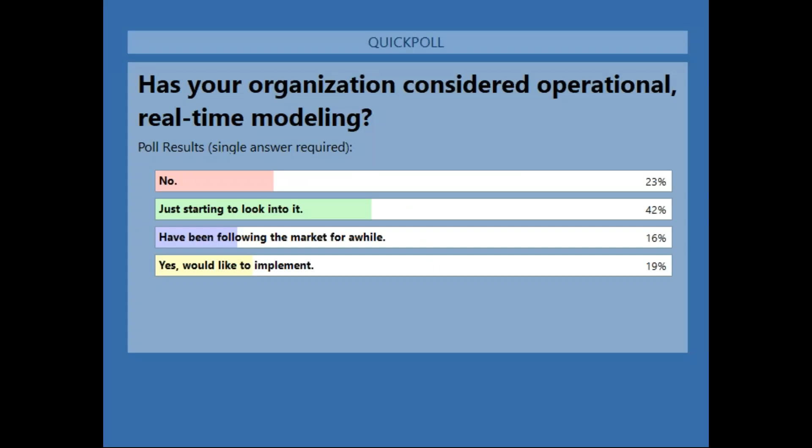Denver Water had some experience with this, and last year we decided to try to make the business case for this. We have a new Business Technology Management Office, I'll call it BITMO, that controls any new IT purchase. It's a pretty detailed process, and not only do you have to convince upper management that this is actually a good idea, but when you're done, you get ranked against anybody else's case, and that kind of determines when you get implemented.

So to make the business case, we also had to list out the costs. The software obviously costs something, plus a new server - probably wish I would have gotten two for this, but we can cross that at a later day, one's fine for now. Then there's the IT time to set this up, install the software, and configure some groups. I actually got control of one group for accessing the server, which gave me a little taste of the power that IT people must feel all the time. It was a new experience for me.

And then there's my time linking the model to the historical SCADA database and refining the model, which is just kind of a part-time thing that I do as part of my role here.

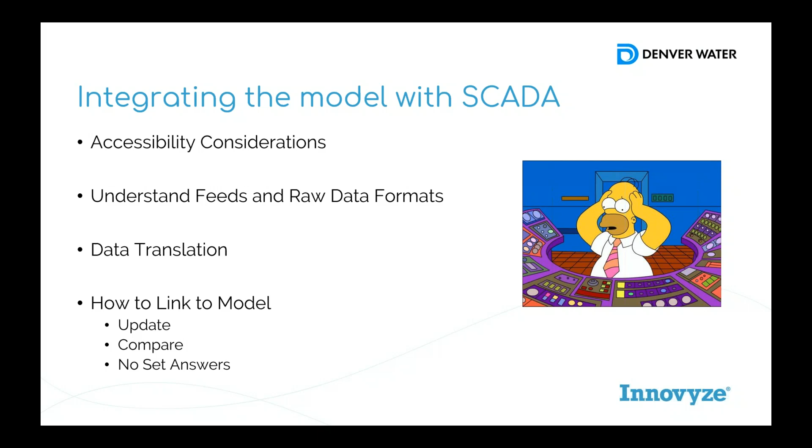After that, it's a lot of time understanding the feeds and raw data formats. A lot of times if you extract data, the program you use might extract it in a friendlier format than the raw database stores. Sometimes you just need to know what sort of information it's storing, what the units are, and stuff. Based on that, you can decide how you want to translate the data and link it to a model, which I'll be talking about in detail. But there's not really a set answer for some of the trickier things you're going to try to integrate.

For me, I have quite a few feeds - approximately 1,300 feeds that I'm looking at linking between the model and the SCADA, some of them to update boundary conditions, some just to compare results.

We include in our model all 68 distributors that we deliver water to, so we don't have SCADA on some of their things, even though there are benefits of having it in the model as opposed to just a demand - it gives us a better idea of what they're actually doing in the system. But with this, I can look back in the future at any pump and know these are the SCADA tags associated with it.

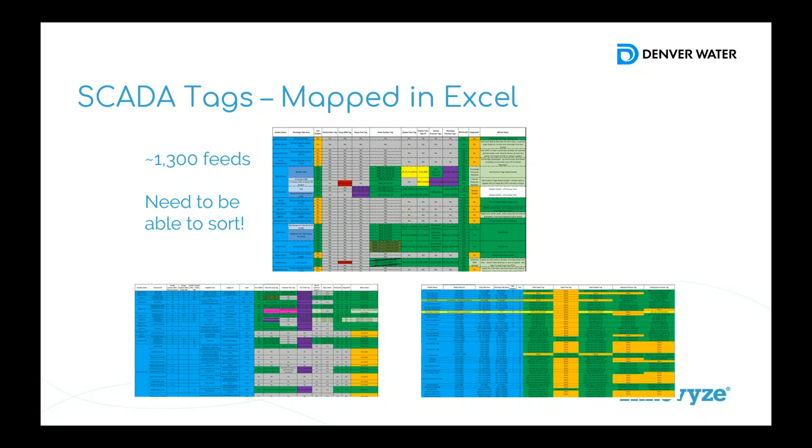So this is nice because once I get the configuration done, which is about 98% complete, I probably won't touch this for a while. So when I need to come back to one of these because the tag changed or something, it'll be pretty beneficial just to have all this mapped out. This also helped me know if I needed to translate data.

So a couple things that are interesting at Denver Water is we don't store binary data, so we don't store like if a pump is on or off, for example. And then another thing is just the way valves work. So in EPANET, a valve status is not something that you're going to find in a SCADA system. So how do you get valve status from what you have in SCADA?

So I have a few different examples here. If you look at this table, feed names are kind of my feed names - I just define the connection name myself. But then I have these lookup tables, units, and then some offsets and factors. So in here is where I can translate a lot of data. A few good examples of this to be aware of.

One is I have one valve, but I have two feeds - one is position, one is status. These actually look at the same SCADA tag, except the status one is using this lookup table. So I have these different lookup tables that I use to translate data.

And so if you look down here and find the same one, what this basically entails is: if my SCADA returns a value between -5 and 5, I'm going to assume that valve is shut, and 0 is what EPANET wants for a shut valve.

I do this for two reasons. One, if I put the lower limit at 0, I've seen SCADA systems sometimes come back and be like -0.1% open. Well, I know that valve's shut - I wouldn't want it to use a default value. The other reason is because if the valve is like 0.8% open, due to the head loss curve that I have for some of my control valves, I would be letting flow through there, and I know it's shut in reality, it's seated. So again, just trying to get around that.

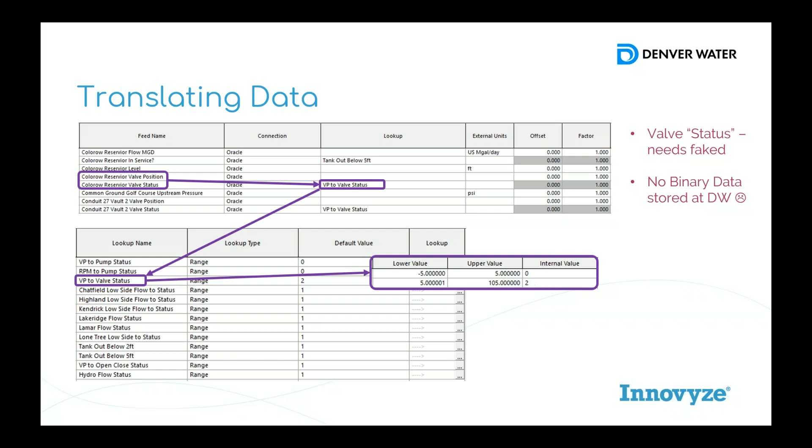Now, what about some other type of valve? We have valves that the controllers just open or close - they're just basically to block off flow from one direction to another. So in this case, it's basically the same thing, only I have a 1 because if it's open, I just want to have it open. These are valves that are never throttled, and so I don't want to do that.

Similarly, I didn't put this as an example, but if you look at the top row, you'll see VP to pump status. Again, we don't store pump status in our historical database, but for our fixed speed pumps, they all have a downstream valve that is in SCADA, so I know from the position of that valve if the pump is on or off. Similarly, at a VFD station, we might not have status again, but we do have flow.

So knowing based on the flow - this is MGD - if I have a very low flow value, I'm going to say the pump is closed, and if I have a higher value, I'm going to say it's open.

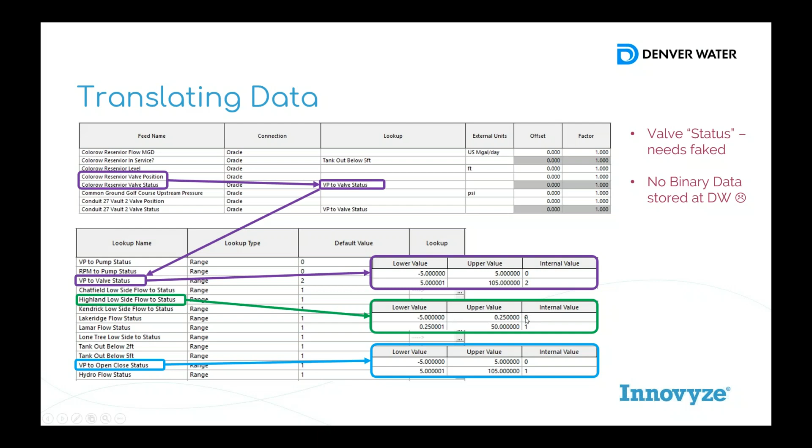So one other thing that you get into with this is setting up operational controls. So you might have places where it's not normal operations, but you know it's something that is used from time to time. One of my best examples is one of our major facilities - it's a pump station and a control valve that move water 2 directions, and it balances flow between 2 plants. Now, if a plant's offline, it's pretty normal for this station to be used constantly, but other than that, it's not. So it's kind of an interesting facility because it's not normal operations unless there's an outage, but it's not abnormal because it's connected to a big conduit.

They want to keep it fresh, so pretty much daily it's at least opened up a little bit to make sure the water's not sitting there. And so in a case like this, there's really not a way to put in a control of when the operator would turn it on based on water quality, because it's just not a consistent thing.

It's something they kind of track themselves. So what you do is you can put in closed-only controls. So this way, if I'm running the model and the station is on, what I have is a control to shut it off so that I don't overflow the tank downstream. I don't need any trigger to turn this on.

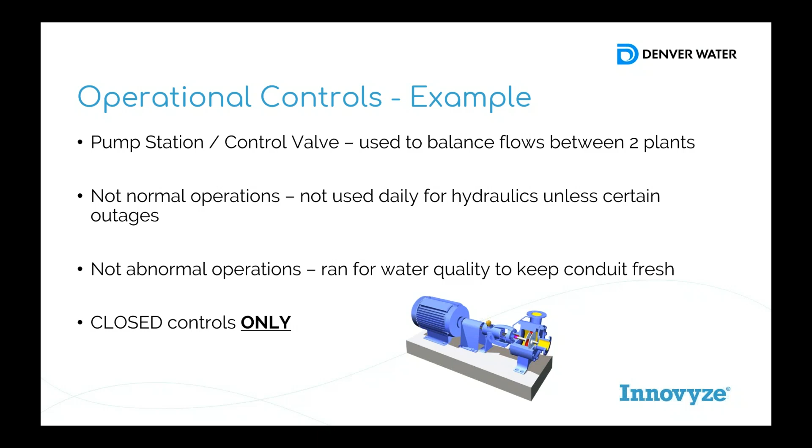Maybe in the future, if I set up models specifically for plant outages, I may get into looking at that, but there are a lot of times where you might just put in a closed control, and maybe the operator's doing something. Maybe it's a pump station they don't use a lot, but they like to run the pumps to keep them fresh, things like that.

Just looking at integration order, if you guys ever look into this, it's always nice to set up your tags in order, and I've learned this from multiple systems I've set up over the years. Tank levels are pretty straightforward. Boundary condition, you can update the level, it's easy to compare. I always recommend allowing overflow. If you're in InfoWorks WS or InfoWater, you can do this. And it's nice because in reality, if the tank gets full, it normally overflows.

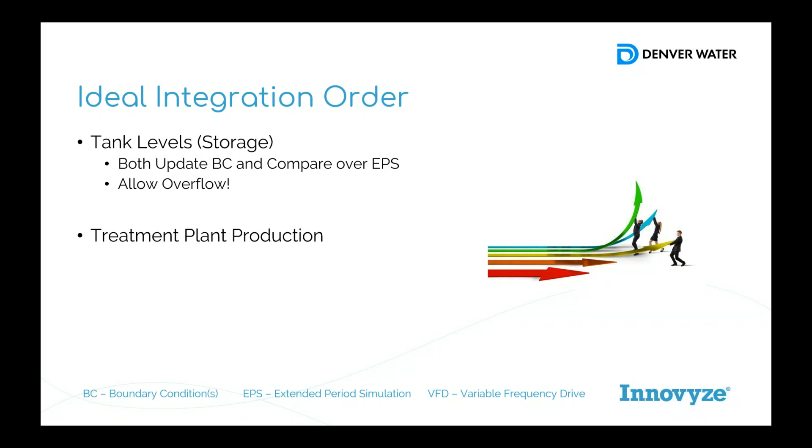And if you're just in normal EPANET without this option, it's going to artificially pressurize the system. You're going to start sending flow in directions it wouldn't really go, and it's just a lot harder to troubleshoot. Treatment plant production is pretty straightforward. Obviously, if you get your supply right, you're set up pretty good. And then pump stations, typically is the pump open or closed? You can compare flows and pressures.

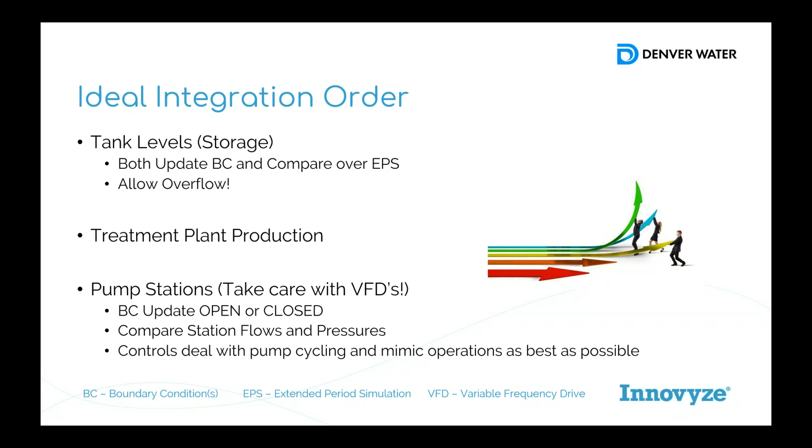I encourage people not to try to mimic the pump cycling. You want to mimic the pump operation. So maybe they have a low duty and a high duty pump and you know when they tend to use them, you can do that. But if they have like 3 of the same pumps and they cycle through them, there's typically not a whole lot of benefit to worrying about mimicking the cycling as long as the station is operating as you would expect it to be. And then VFDs, I don't really have time to go into this, but you do have to be careful and play around with these quite a bit more in my experience.

And then when you get to valves, basically filling valves are pretty simple. A lot of times it's just open or closed, or maybe 50% is pretty much their standard position for opening. So those tend to be the easiest type of valves. Major control valves are a little easier as well because you can either say open or close, or you can get that position if you have a good head loss curve. If you do have a SCADA system where the operators can enter flow and the PLC will set that, then you can also do those as well. And then comparing flows and pressures is the main idea.

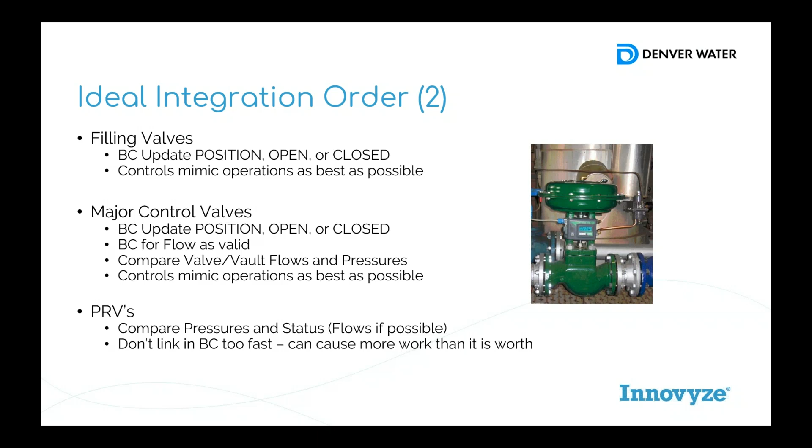The trickiest ones tend to be with PRVs. I always encourage to compare pressure and status to see if the PRV is active. But I say don't link these in too fast. You can chase your tail for quite a long time, and I've done this on quite a few networks. So right now, I don't have any PRV linked in to actually determine if it's open or closed or to set the downstream pressure in my model. This is purely a comparison thing to see how much I can tweak my model before I decide if I need a PRV linked in. That'll save you so much time if you're ever doing this.

So just a quick polling question here: what is the biggest hurdle to committing to an operational or real-time model? Just looking for some feedback from you guys on that.

Kat, I can talk to that just a little bit here. This is Greg Brazzo, and I've been in industry for quite some time, both on the consulting side of things as well as the software side of things. And over the years, the main answer that I've gotten to this question has a lot to do with staffing. It's not necessarily just genuine buy-in of predictive modeling, of operational modeling, but historically I've gotten a lot of concern over taking folks on the planning side of things, folks on the operations side of things, and how it's going to work, where you're going to put those folks together in a room to hash out the best way to move forward with these things.

It's just something to stew over for a little bit, but I've heard that a lot over the years from a lot of municipalities. What I'm generally hearing these days is that the planning group and the operations group in a lot of districts, municipalities, tend to be getting closer. There seems to be a lot more communication. I don't know the exact reason behind that, but I think it's good for the industry. Just something to think about.

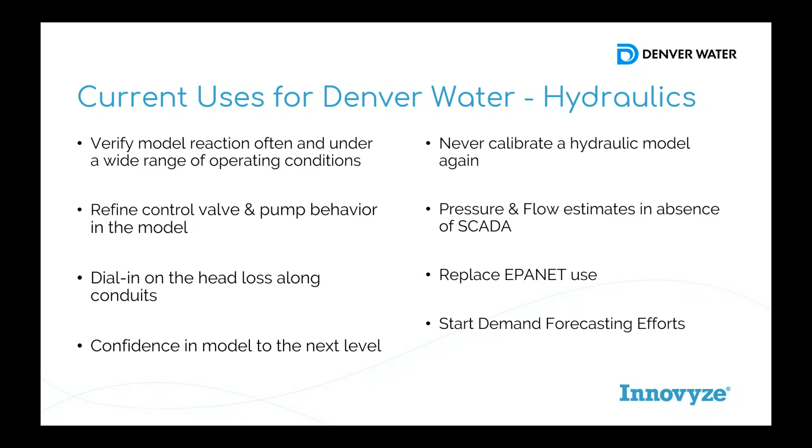So it's pretty cool. People have asked me for this before, and now I can just run a steady state model with all my tags linked in, and it'll give me the best estimate of flow and pressure at the current time. We do have some people using EPANet because InfoWater is too hard to use for them. So that's going to be nice. And then starting some demand forecasting. I, again, don't have time to get into that.

Something that I hope to start this next week, actually, is we're going to try to give people a current real-time water quality in the system. Near real-time, with the SCADA latency and the time it takes to run this, it'll probably be 20 or 30 minutes out of date, to be honest. But the idea will be to have a web browser where someone at the lab has a weird sample and they want to see, well, what do we think the water age was when we took this sample? They should be able to figure stuff like that out, which should be pretty neat.

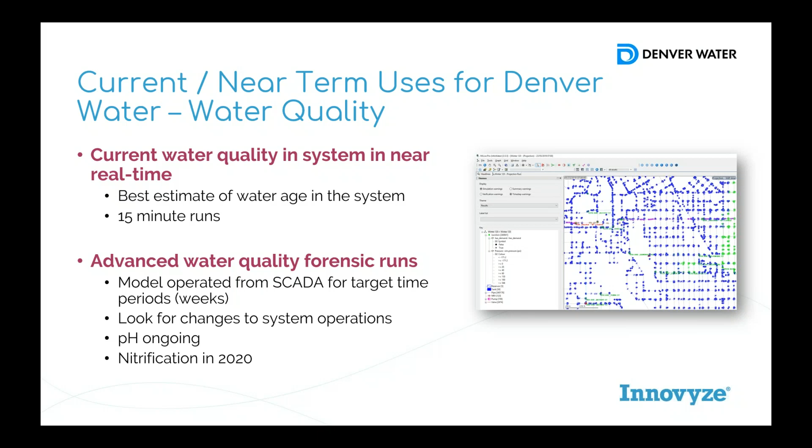And then we're also getting into some advanced water quality forensic runs. So operating the model how it was based on SCADA for 2 to 3 weeks. And then pH is one that we're starting up right now to look at. Nitrification is tagged for next year, and we might look at system operations when we're taking facilities offline. Can we change some of these operations to enhance our water quality to some of the targets that we're looking at?

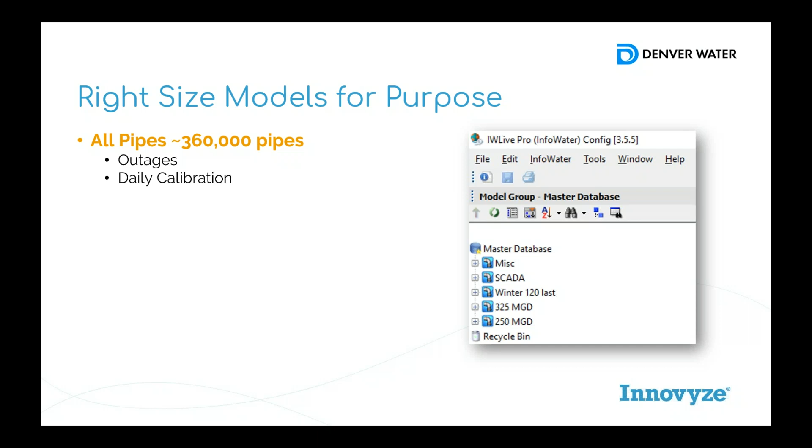I would always say right size your models for a purpose, which depending on your model may not be a big deal, but our all pipes model is about 360,000 pipes. So I'll run this one for daily outages and daily calibration stuff. When we run water quality, we never need water quality at a dead end with no demand. It just makes the results look bad. So we'll use facility management to remove all the hydrant laterals and stubs and bypasses. That should knock us down about 90,000 pipes.

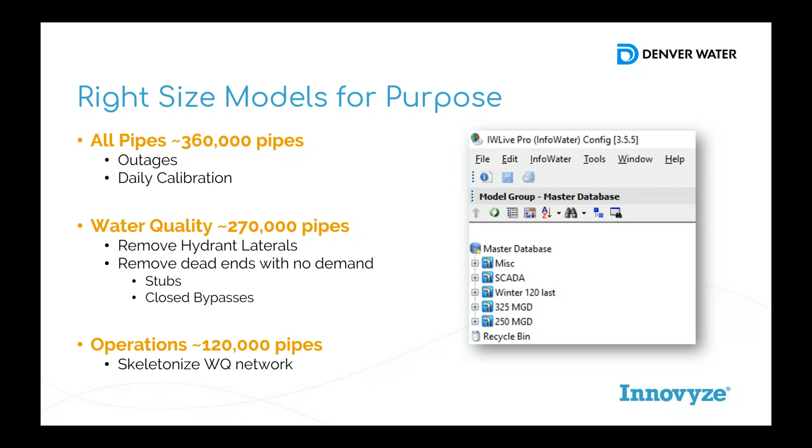And then for operations, if load control looks at this in the future, what we want to do is get that down to about 120,000 pipes so it runs faster. Having said that, they still have the same number of SCADA feeds, so the query on the SCADA system, you can't really improve that. And then just quickly, some possible uses to wrap up, stuff that we're going to show O&M that they may use it for. They could monitor pressure and flow on their own, not having to call me up.

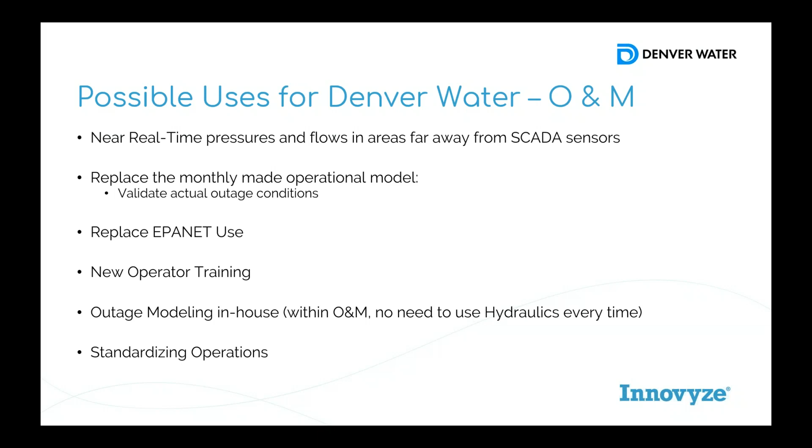In the past, we've given them a monthly outage model just for them to be able to mess around with. They can now do this based on current conditions, and they don't even have to bug us or try to use EPANET, which should be nice for them. New operators might like this for training. If they want, they could standardize operations. It's kind of up to them. That's obviously not my department.

People might want to run this, get in and say, hey, well, if I run the system like this for the next 10 hours, maybe I don't pump during this time of day and save some money and stuff like that. I kind of talked about the water quality.

One of the GIS integration things that'll be interesting for me is every time we replace a PRV or control valve, it gets a new GIS ID, which I know how to sync with the model, but I don't even know if that means a changing SCADA tag. So it's just some process that I'm going to have to look at in a few months the next time I update the model from GIS, and then possibly tie into optimization or a bigger decision support system. And that's kind of it for my presentation.

I'll leave you with one more polling question, and then I'm going to switch it over to the other presenter. The next question would be, do you think that your operators would believe in an operational and real-time model? It's just been one of the more fascinating experiences of my life, getting to work with engineers and operators both. And so to me, this is a really fascinating question.

And as you answer that, I will just turn it over to Ron Smith, Systems Optimization Analyst down at Colorado Springs. He's a great guy. He's doing some really cool stuff he's going to show you about. So I'll let you take it away, Ron.

Yeah, and Ron, before you get going, this kind of tees into the points that I was trying to make a little bit earlier. In a lot of cases, historically, we've gotten some buy-in challenges, and it tends to be on the operations side of things. But what we've seen over the years is folks on the operations side have actually been using modeling software and software that can aid them day in and day out. And so I think we're going in a really positive direction when it comes to this.

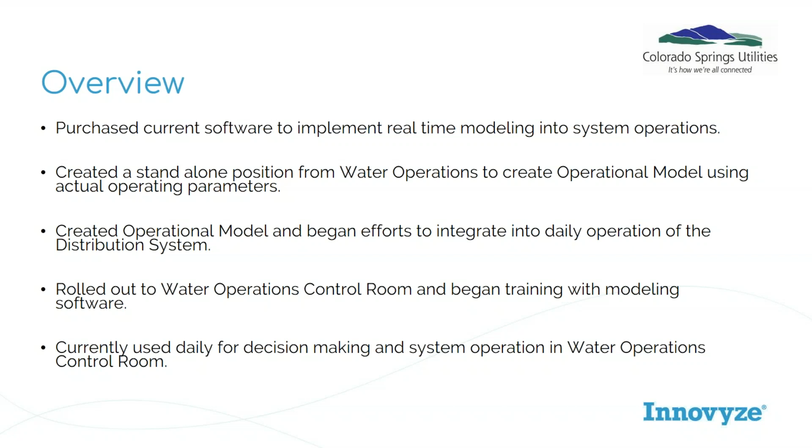One of the most important things that we focused in on early on, and I think Kedrick touched on it as well, is just having an accurate demand in the model. Our winter months might be 40 million and our summer months can be 120. And then we have the shoulder season in between.

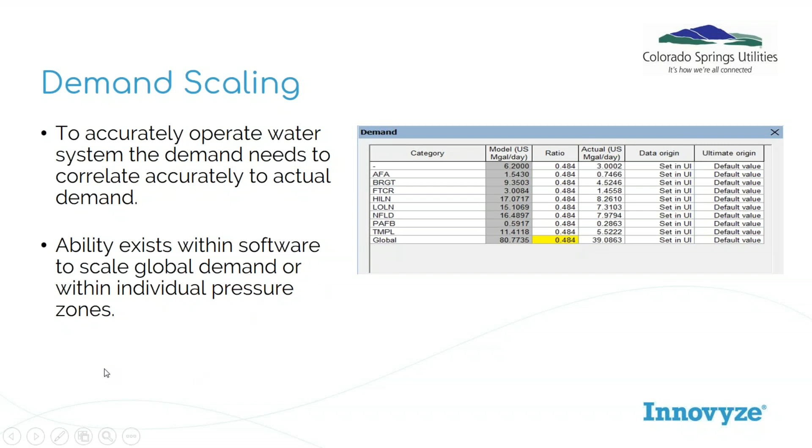One of the features in our software is an ability to scale the demand, both globally or by pressure zone. So we have a ratio in there, and in this case, you'll see the 0.484. To arrive at that, we use an Excel spreadsheet to determine our consumption based on production rates and tank levels. So in this example, for that day, an operator would have predicted a consumption of 65.5 million gallons in our system.

So we've created another spreadsheet with the factoring to determine what it would scale the traditional demand to. In our case, in the summer, it's 125.4. So this 0.484 would be entered into the demand scaling window. And then when they run the model, and the operators do actually run the model in the control room, they would be intending to run 65.5 million gallons.

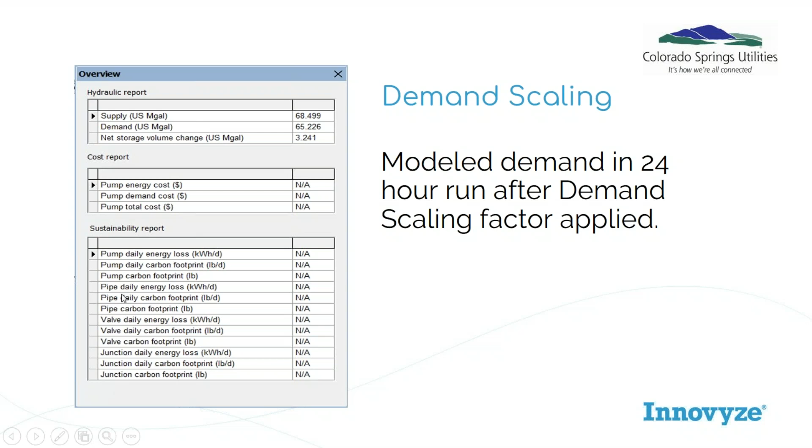Our methodology by using this, obviously the operational adjustments are being made using modeled results rather than operator intuition. I myself operated before I took this position, and I would operate a single valve, and I may have thought I know what could happen to every tank, but this is taking it to the next level. One of the big issues that we've had at this company is just the movement up and down of treatment plant rates to affect tank levels.

And we make the treatment plant production rate decisions through the model as well. On a day where we might have made 5 changes in the past, we make 1 at this time. The majority of our flow control valves and pump stations in the model are operated using a live control feature, which I'm going to segue into next. The live control is a major leap in the accuracy of the model.

Then you get into the predictive state, looking out past the current time of the model run. We look out 24 hours, and they will make manual entries, being a predictive move that they want to happen to a valve or a treatment plant rate, looking forward to balance the system.

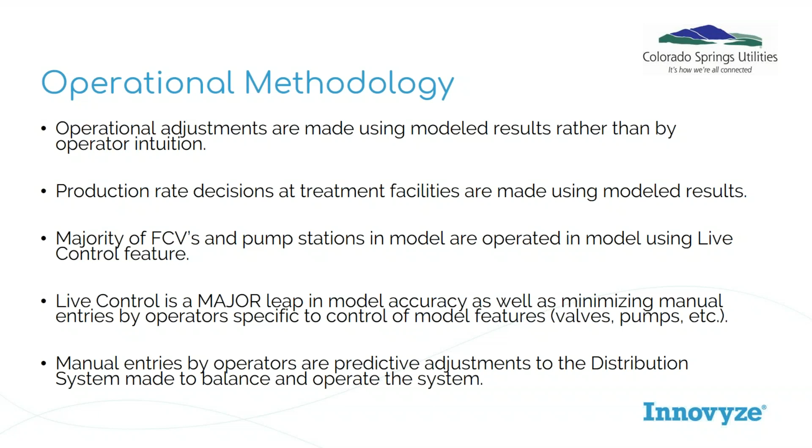So live control is in the menu of setting up a valve. If you look here at the data origin, it says that it's live data. By that, it means it pulls the SCADA data every 10 minutes, and then it logs it into the model as the flow that was happening at those intervals, or pump statuses on and off.

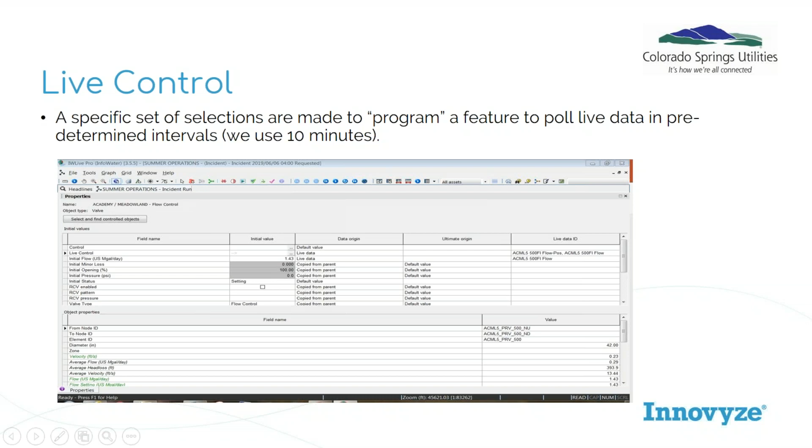And what it creates by taking all of this data is, the graph for real time is really going to be the predictive result as well, until you update the data or tell it to do something different, where in this case at 5:50 in the morning they closed the valve, so it went to no flow.

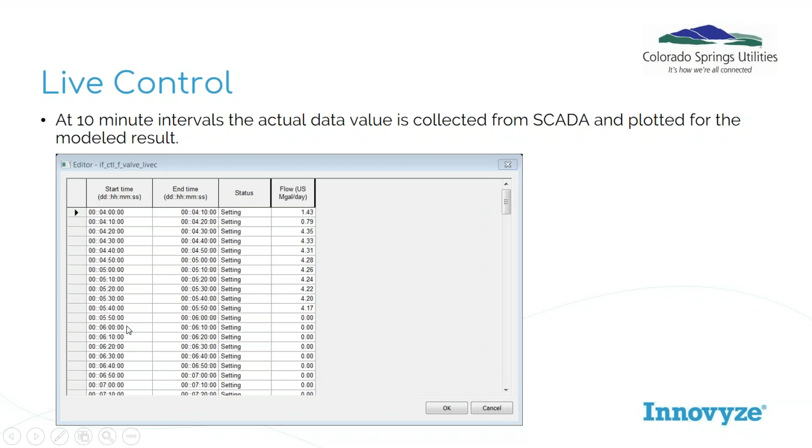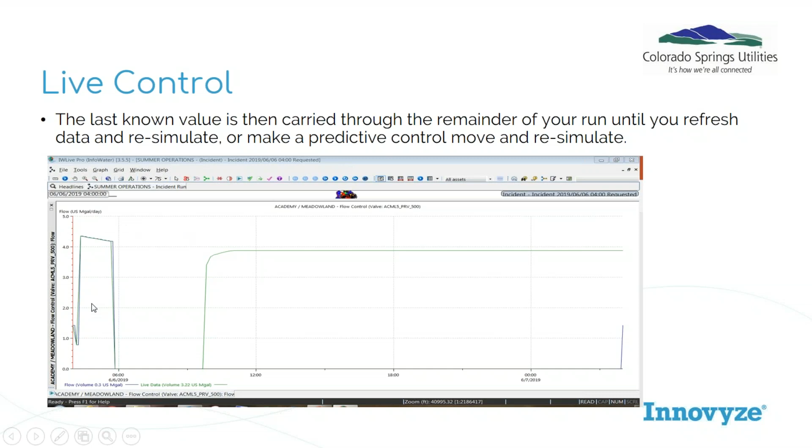The next push would be to get the pump stations, because we run ours on level control, but with the live control theory, we should be able to just monitor on-off status. Then as a pump is turned on or off, you would just resimulate the model and it would refresh the data, bringing it into its current state. So this has been another key element in us being able to operate our system using the live model.

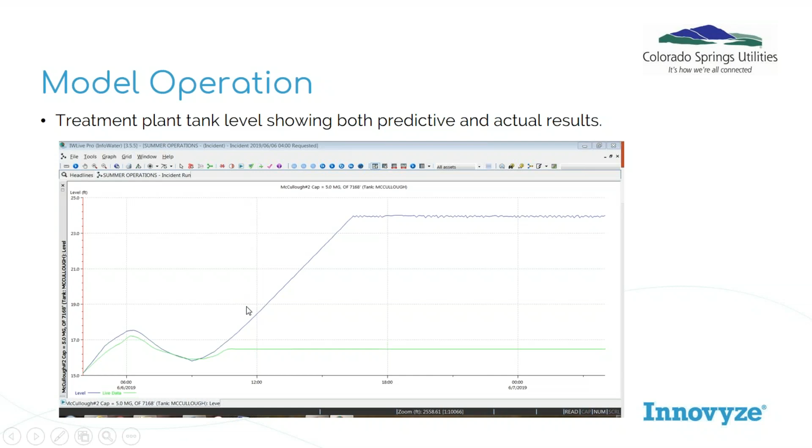An operator can go in, and here's your live data. And at 1 o'clock in the afternoon until the end of the run, we start at 4 a.m., so it would go to 4 a.m. plus a day, they changed the treatment plant production to 22.5 mil versus the 27 that it was running.

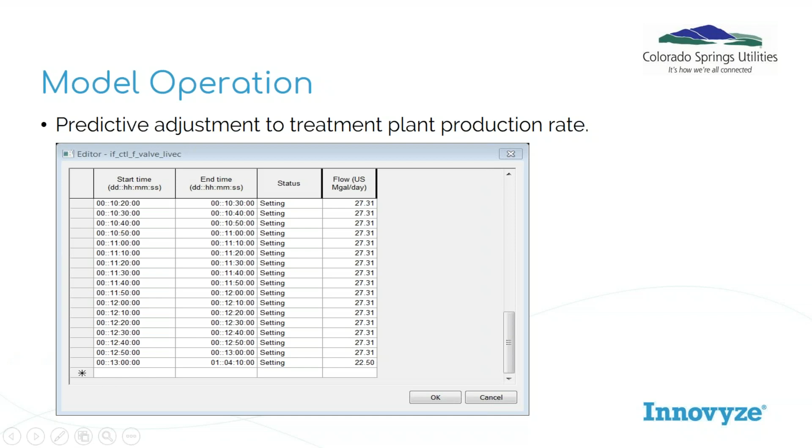After they make that change, this is the 24-hour result of that same tank, and you can see about 1,300, both in the model and with a little bit of a lag. That's actually where it started trimming the tank level off. It only got to a high of 22 feet, which is where they would have wanted it at that time of day. And then it ran out through the rest of the day.

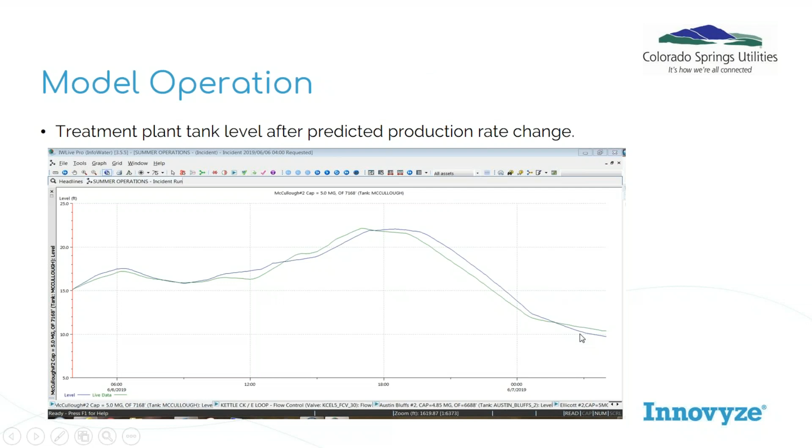That's pretty accurate in my mind for a treatment plant tank that has a lot of downstream valves that can affect the level. This methodology would be used for all of those valves as well. So they literally would go into the model and make those moves ahead of actually making them in the SCADA system. And this is just an example of how that played out. And again, the green line is real data. So that was a good day.

Moving into some of the benefits, and there's obviously more than I have listed here, but it does standardize operations. We have 5 operators, and this is making things a little more predictable. Our distribution crew at one point would know who's operating by the differences of how it was operated, but we're starting to confuse them a little bit and gain traction with balancing it and standardizing it.

I can also speak to the second one. Operators gain a much greater and broader knowledge of impacts to our system by predicting the changes through the model. You can see all of the fishbone and cause and effect. Our system operation during planned and unplanned outages using the model, we've greatly benefited from that. You can plug in main breaks, several different things can be populated in there.

There's obviously better operation during significant changes in our system demand. When I mention a weather event, we can be moving along at 120 million gallons in the summer, and if it rains in the afternoon, drop to 80 million gallons. And by adjusting that global demand number, if you just simply change that factor, your tanks are going to fill up, and then you can figure out what changes you might need to make to treatment plant rates, or if you can push the water out into your tanks.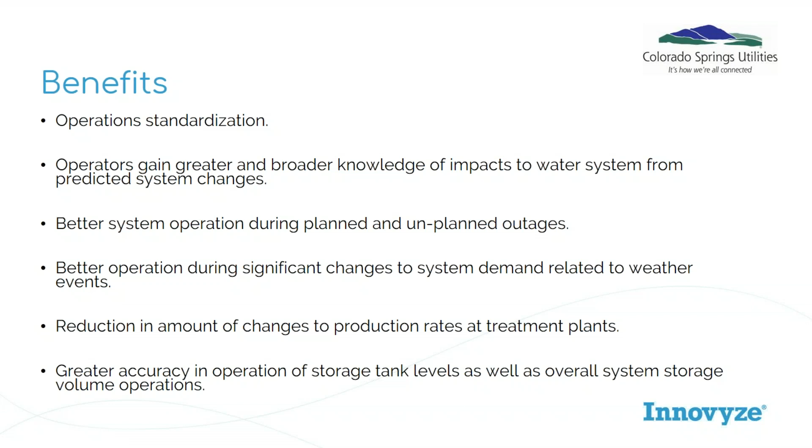But they now make those changes in the model using the same valves that they would operate in the system, and then they just push those changes into our operating system. We've achieved a far greater accuracy in our operation of the storage tank levels as well as overall system storage.

Some of the future enhancements that we'd like to make, and this is one of the first few times that the developers and the technical team at Innovyze have seen this, is that global number that we edit, and I have side by side the live control. It's a big ask, but it would be very nice if you had a clock type scenario in there where you can say for the first 12 hours, I want to function at 120 million gallons, and then I've got rain coming in and I want to function at 80. So perhaps in the future, if we could break it down into a time-based thing and have different consumption or demand rates at different times of the day, that would be phenomenal.

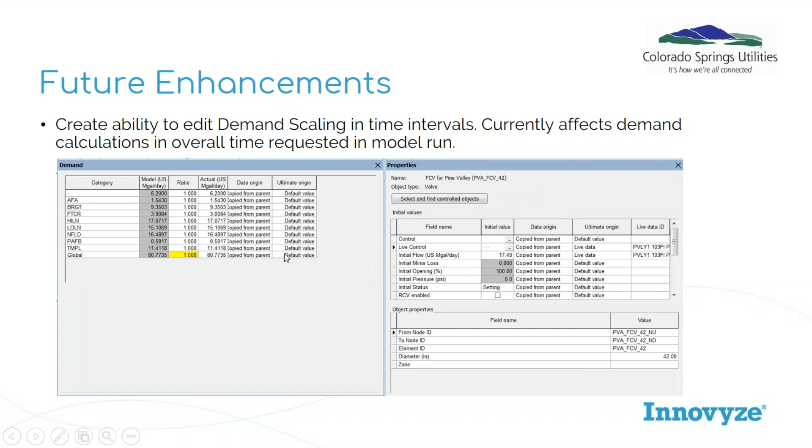One of the other enhancements, and we've started doing it in its infancy, is taking an individual zone, based on a visual that the tank is going down faster, even in real life, than the predicted result, and you don't have any main breaks or pipe breaks in that area, is to raise the demand in an individual zone and change just one of those factors above the global, and then figure out how much more water is being pushed through that area. So again, we've just started using that, but had some pretty good success with that.

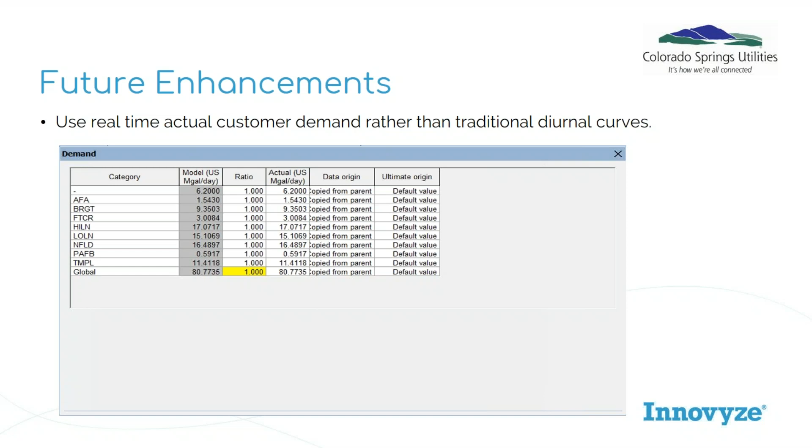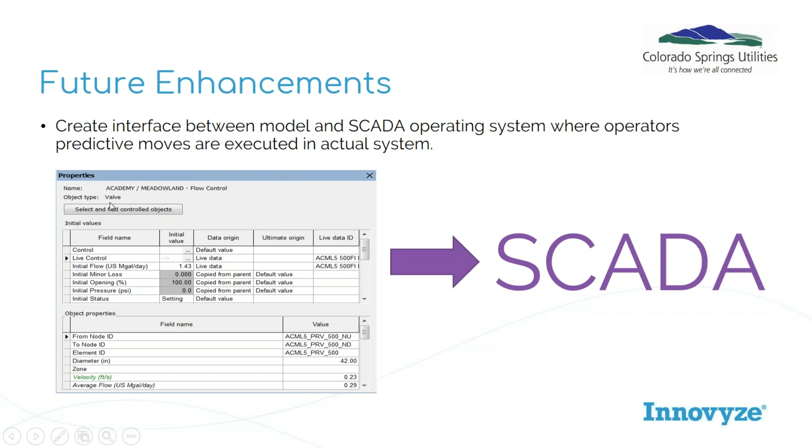Again, it's quite a ways out there, but it can happen. My other pitch and shout out would be for Innovyze—anything we've asked for, given time, has been supported. I want to touch on that again, both internally in our company and with Innovyze. The support is phenomenal, and I think that's made probably the biggest difference to get us where we're at. So with that, I'm going to turn it over to another polling question, and look forward to questions at the end. Thank you, folks.